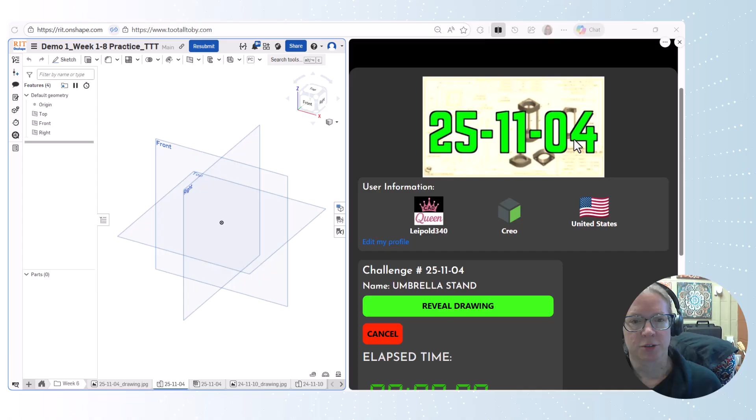All right, I am jumping into this Too Tall Toby exercise. Honestly, not in Creo today, but in Onshape. And this is going to be a great opportunity to talk about how to do some assemblies, how to do multi-body modeling in Part Studios, which makes this really nice. But then there's some trade-offs depending on how you want to create this. So there's some interesting stuff to do here. I haven't done this before, but I'm looking forward to jumping in and giving it a try.

Okay. All right, so we've got an upper and lower base made out of ABS, and we've got these three wooden rods made out of red oak. Nice little section view here. It looks like the top and the bottom parts are mirrors of each other, but with a chamfer on the top. So maybe a plane in the middle there.

So depending on the end use with these three wooden rods, because they are identical, depending if you want to have a bill of materials that looks like this, then I would create all three of the separate parts in a single part studio, but then I would assemble them so I could place this part three times, and that'll help make my bill of materials really nice.

If I didn't care about the bill of materials, I might make the three parts all extruded and then use it as a remove material, a Boolean cut of the green base part, and not worry about the bill of materials and just model three separate parts. They would show up in the bill of materials three separate times. So depending on the end use, there are definitely different approaches that you can take to a part like this.

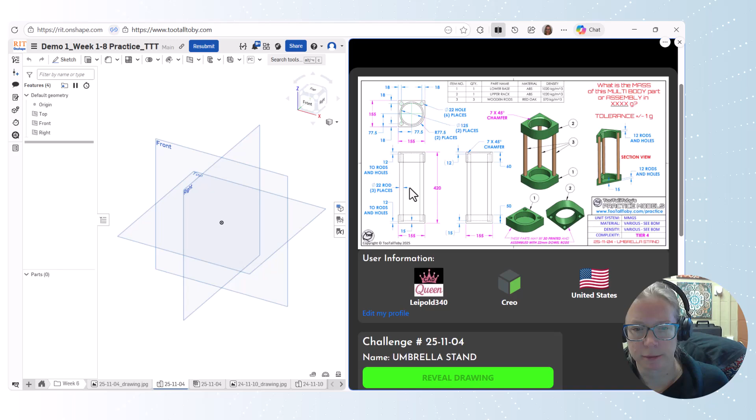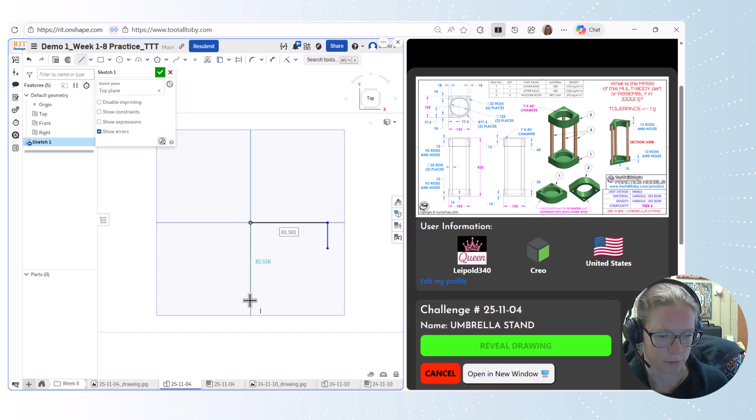All right, so I'm going to start with the base part on the top plane, and I'd like to expand this out a little bit. All right, so we've got a bit of a straight part. So that was the out and in trick to switch from a line to a tangent arc. Great trick, love it. Okay, horizontal, vertical, tangent. Let's make those two lines tangent. All right, let's get some dimensions on here. So each side is 155.

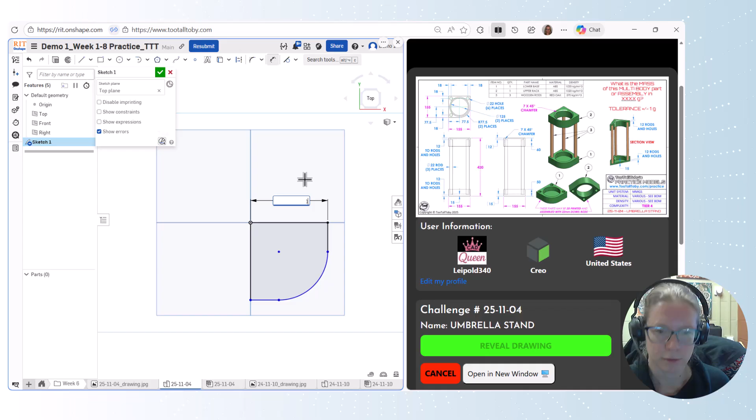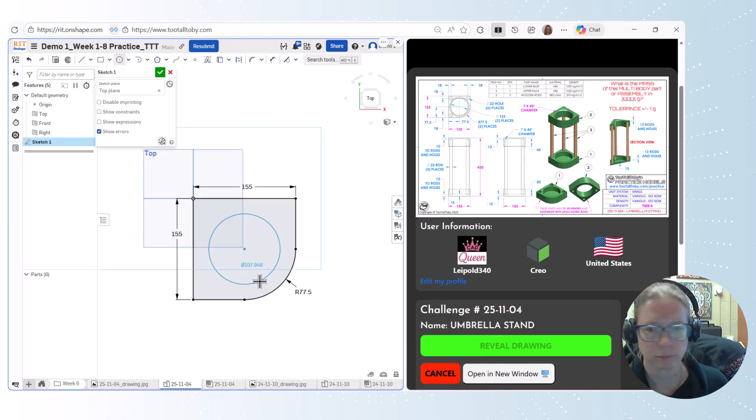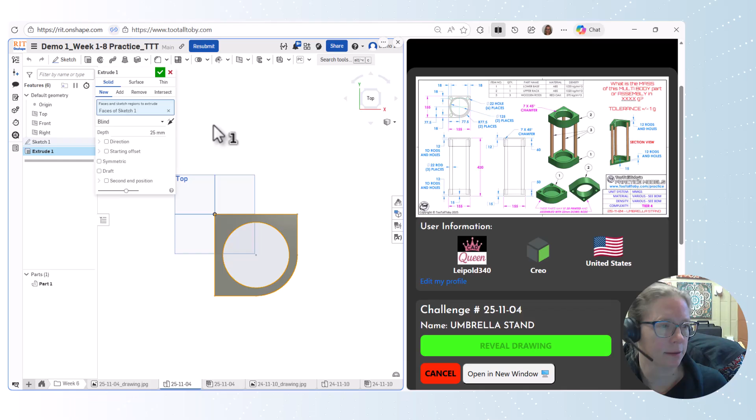You know what? I'm realizing. Oh wait, we are in millimeters. That's fine. This radius is 77.5, and this side is also 155. And we're going to add a hole. This hole at the bottom is 125. Okay, and that looks pretty good. So let's extrude that. And it has a height of 50. Okay. Shift 7 is my default view.

Okay, so now I'm going to create a plane. I'm going to take this top plane and I'm going to make an offset, and I'm going to go the full height, 420. That's what I'm going to sketch the top, or actually, nope, 420 divided by 2. There we go. All right. So let's mirror the first part over the mirror plane.

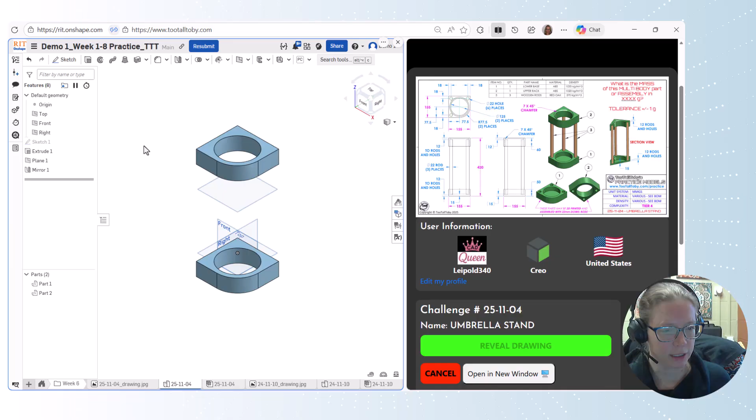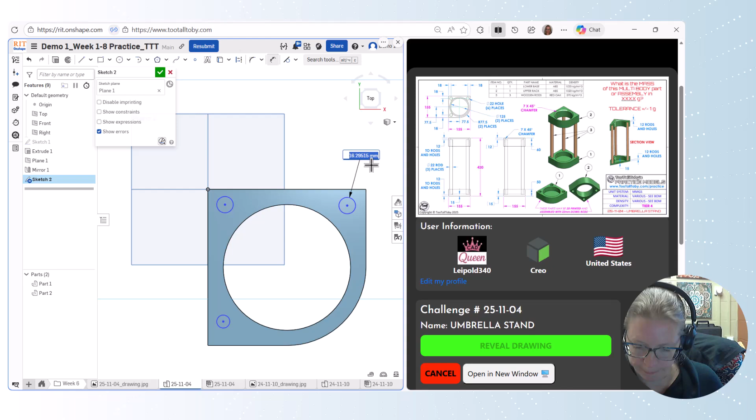Okay. Let's create a sketch on this plane. And let's get those 3 holes added in there. So I have a hole here, here, and here. They're all going to be a diameter of 22. So let's get these about where we want them. All right, I want those 2 points to be vertical. So we're going to grab vertical and click point and point. And then I want the other 2 points to be horizontal. And then I'll use E for my equal sign to make all of these holes the same diameter. And we'll finish up with some dimensioning.

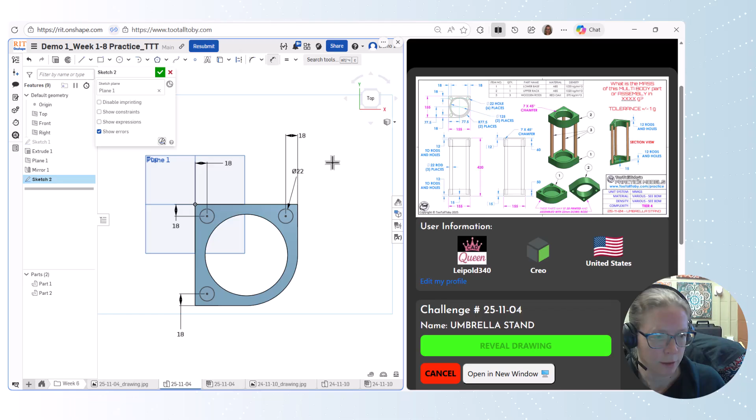So here to here, we're given that dimension is 18. Here to here, we're given that dimension is 18. And we could have done some of this with like construction lines to get some of the spacing to be the same, but I'm placing the dimensions as they are shown in the drawing here. Okay, so that is this sketch.

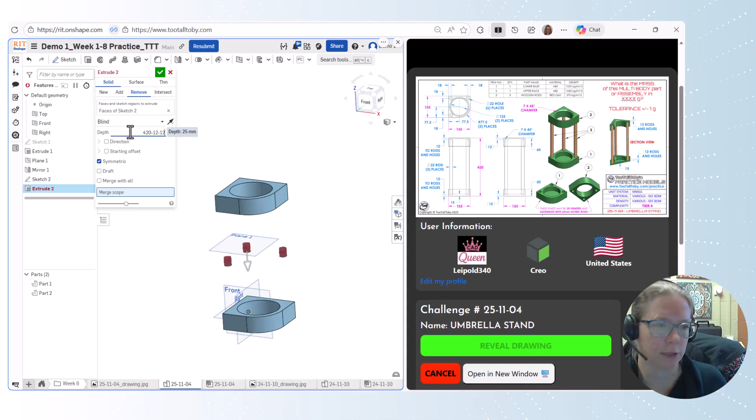And I'm going to use that sketch, and I'm going to extrude it. And I'm going to make remove material. It's going to be symmetric. And let's see here, 12 to rods and holes. So the overall length here is going to be 420 minus 12 minus 12. Okay. And we're going to merge with all. So we're going to remove material from both the top and the bottom. So we absolutely could have gone down to the bottom and then mirrored it. But we'll do this. Okay. And then my sketch is still here.

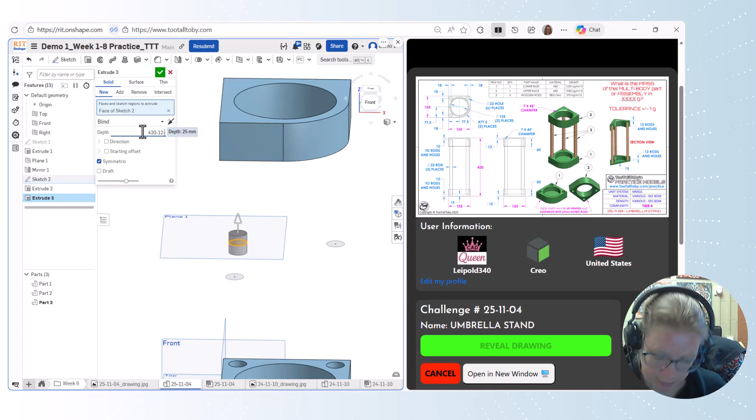So let's take the back one and let's extrude that one as a new part. We're going to make it symmetric. And that is also going to be 420 minus 12 minus 12. Okay, making sure it's a new part. And there we go. Okay, so holes are 22, the rod's 22. Okay. So we're not quite there yet.

Let's take and extrude from the first sketch. Let's take that center hole. We're going to extrude that up 15 as we see in the front view here. Okay, we're going to merge with part 1. That's good. Okay. And then up here on the top, we have a chamfer.

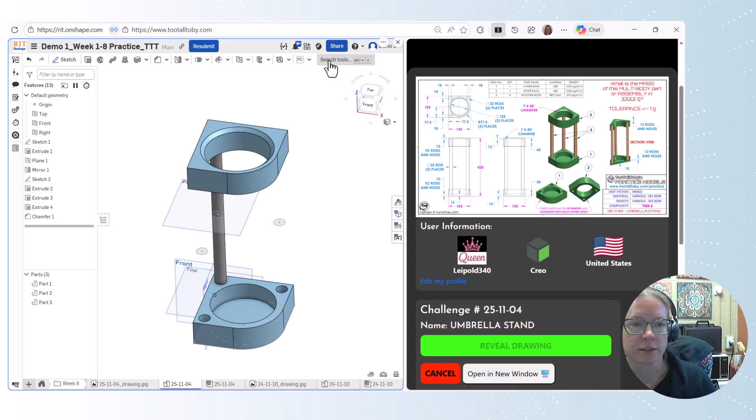Distance by angle, so 45 by 7. Okay. Just kind of checking to make sure I've got all these dimensions. I noticed that the top one is actually a height of 60, not 50. Good thing I checked. So let's use move face. And let's take this face and slide it down. Oh, 10. So instead of 50, we want that to be 60. Let's check. Yep. Okay. Anything else here?

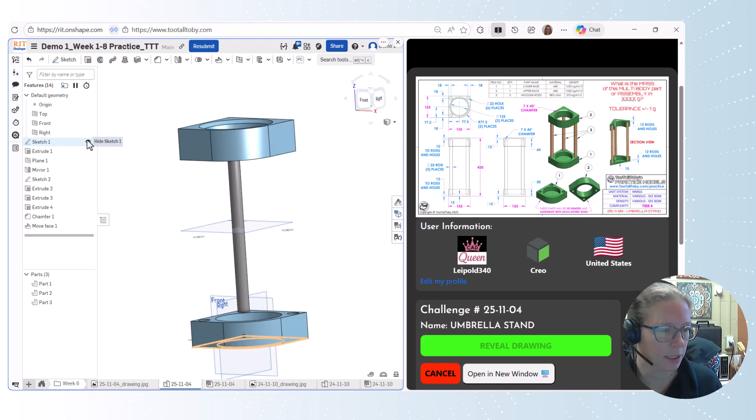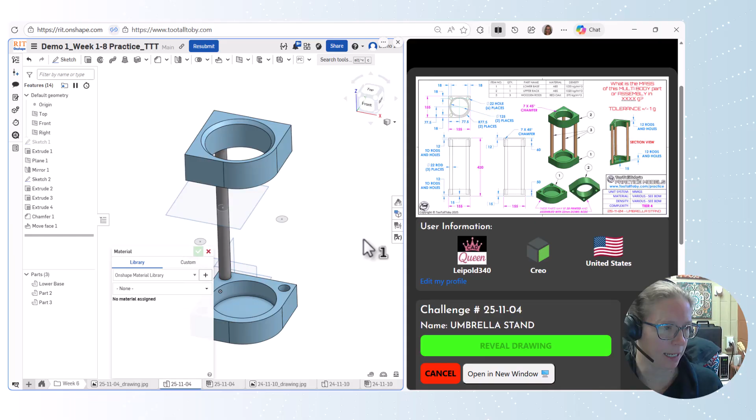I think we've got most of the parts created. Let's make sure they're right. So part 1, we're going to edit. Let's rename that. Part 1 is our lower base. Okay. Part 1 has a material. Sometimes I have a Too Tall Toby material library here. I don't have it today. Let's see here. I do have a custom table, so I can figure out that the lower base is 1.4 kilograms. Actually, I think this is applying to the entire part. But for today, we'll just do ABS. Okay, and we'll set it to be green.

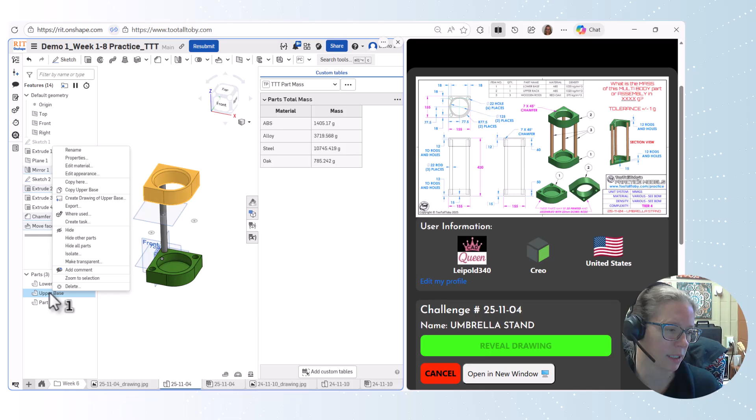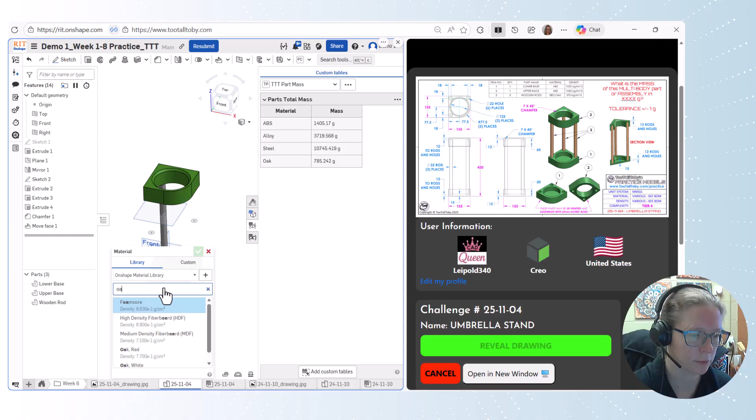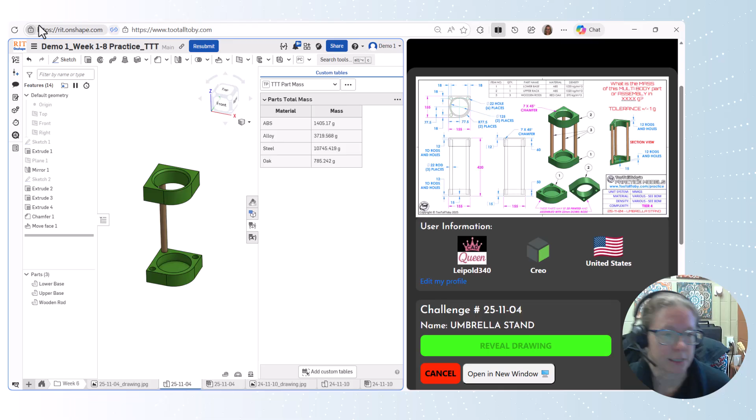The second part, we'll rename. We'll assign a material. And we'll, oh, it's green, good. The third part, we'll rename. And we'll assign a material. And we'll give it a color. We don't have great colors here. We'll pick something kind of brownish, maybe give it a little bit of a softer brown. There we go. Shift P will hide sketches and planes and all that fun stuff. Okay, so this, I think, looks pretty good.

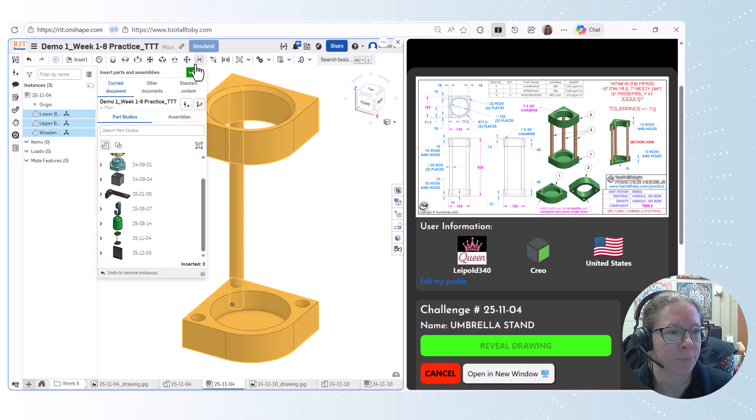For the assembly, let's go to here. And let's insert. Okay, so again, I made the choice that I wanted, oh, here's all, see all the work I've been doing. For this part, I decided I wanted to keep a good bill of materials. So I wanted my bill of materials to have the quantity for each of the parts. So I needed to do that by having individual parts. I brought them all in together and I can group them. They're fine the way they are. So we'll grab all those parts and we'll group them. We'll take the base and we'll fix that.

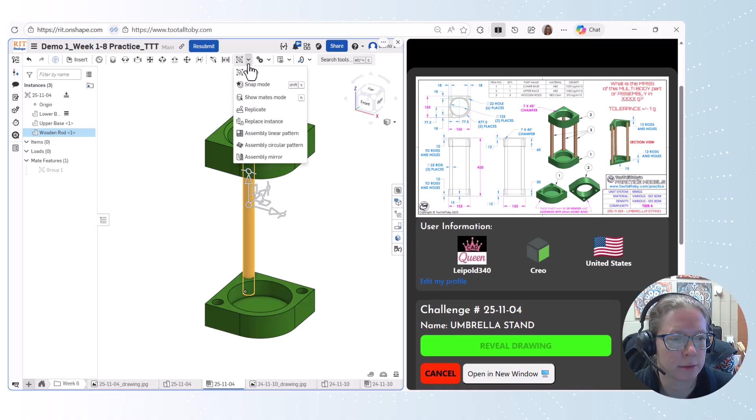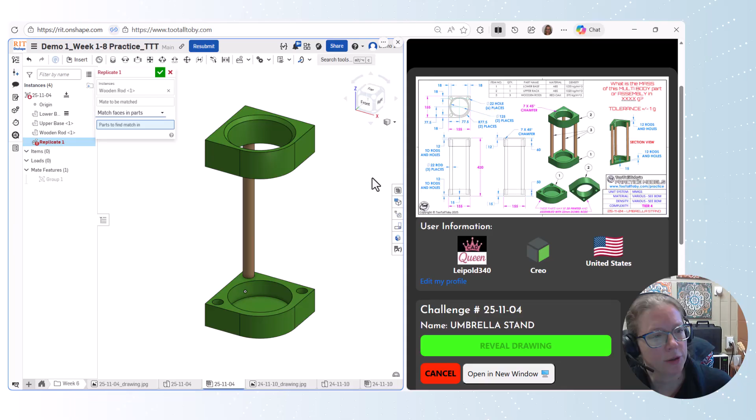Okay. And then the wooden rod, let's try replicate. Okay. So match faces in parts. Oh, all right. So it's actually not letting me replicate it because there is no mate. So if I had assembled this into the bottom, I'd be able to replicate it. So I can show you that. Actually, let's do that. So let's ungroup the rod. We can leave the top and bottom where they're located, but we'll fasten the bottom of the rod into the hole. Okay, that looks pretty good.

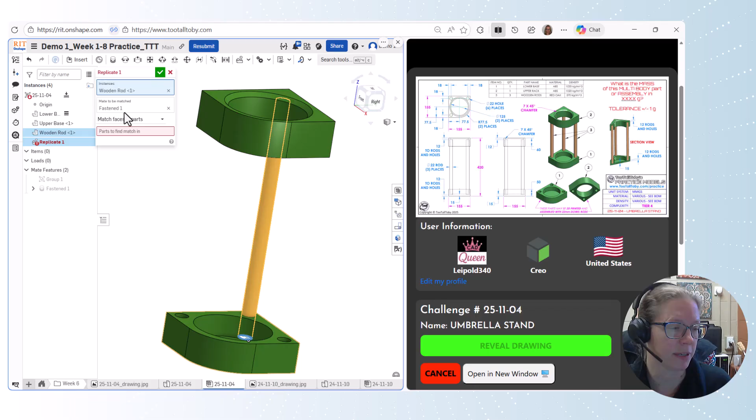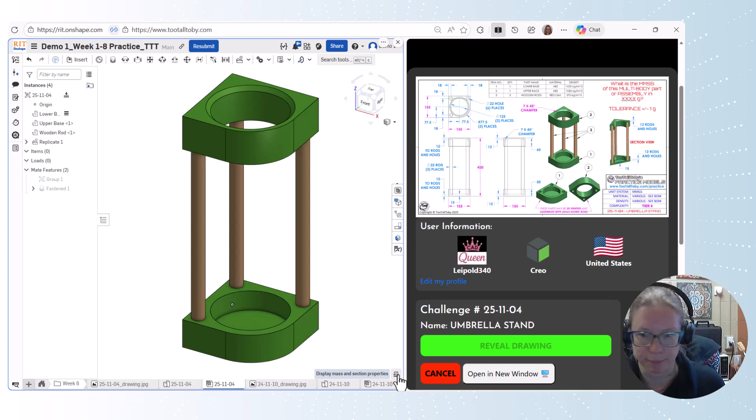And then if I use replicate, instance is the wooden rod. It picks fasten. Match faces in parts. We're going to pick this part. And there we go. All right. So our bill of materials here is going to update and show 3. Right? We've got the materials added. I'm not confident that my mass is going to be right because I don't have the Too Tall Toby masses here. I might have to go back and modify those a bit. But let's just check. If I pick all those parts, my mass I have here is 1638. Yeah, I think it's just the mass, but we can still try and fix those.

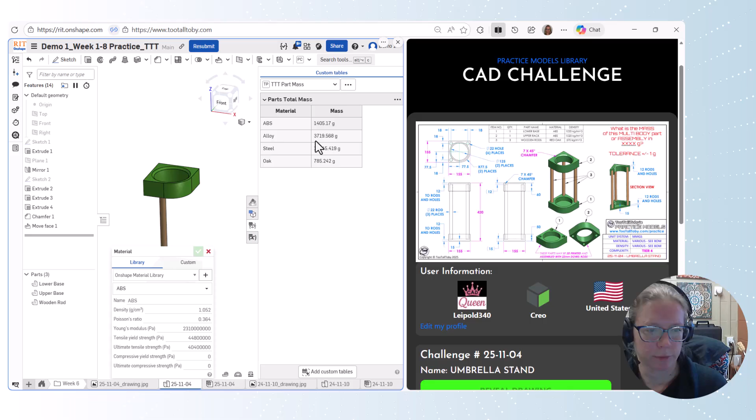I'm going to go change some of those masses in the part. Okay, so the lower base, edit material, the density here is higher than what we have. And for the wooden rod, we have different densities. So we'll make an update to that particular. I'll post an update with the mass, but here's a good indication of how you would assemble things, right? You want to make sure you got a single part fixed. The upper base, I have grouped because I designed it in the right place. If you had made these as 3 separate parts and had to assemble them, it'd be pretty straightforward by mating one of the wooden rods, and then you could mate this part on top.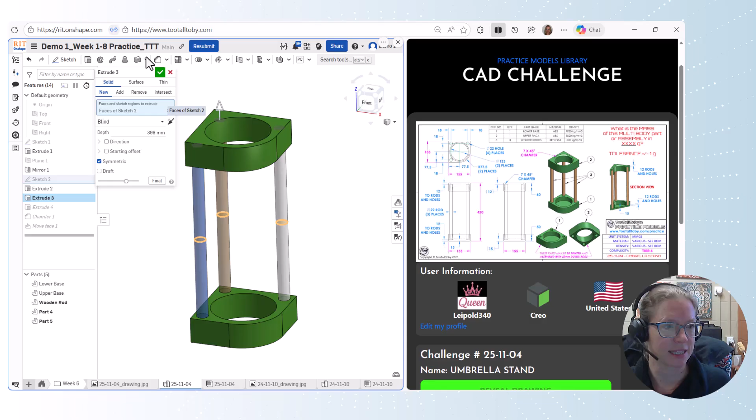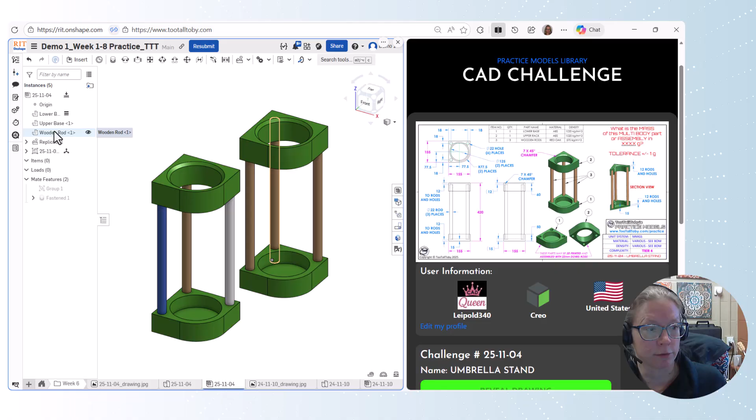If we had done it a different way, okay, back here, if instead of making the one extrude, I instead had created all 3 of them at the same time, then if I still need it as an assembly, a great option might have been to use a rigid part studio, and then you can bring them all in together. Okay, we're going to place this over here. We'll show you the difference with a rigid part studio. So I brought it in just as the part studio. I brought in all 3 parts. So the lower base, upper base, and one wooden rod. As a rigid part studio, it shows up as one line. Right? All the parts are listed inside of there, and they are completely stuck together. I cannot move them independent from each other. And if I needed to, I do have the option to dissolve that rigid part studio.

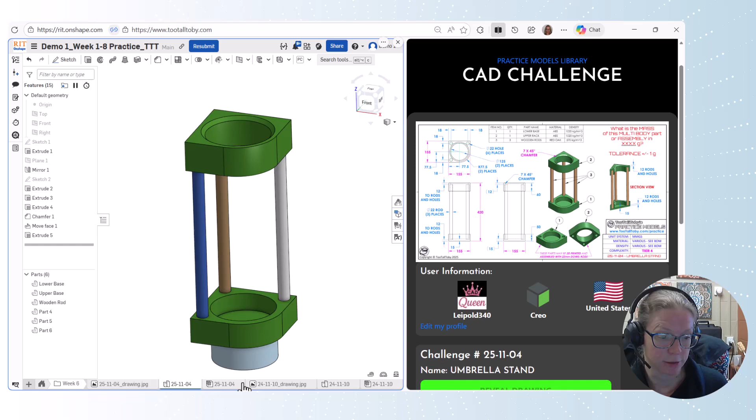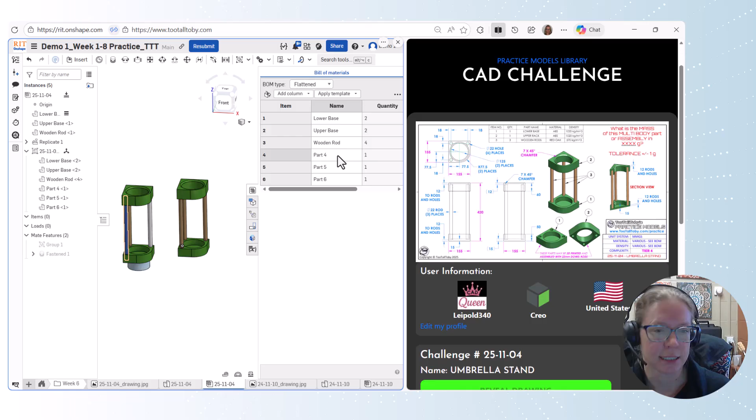Okay. The thing I love about rigid part studios is if I went in here and I added a totally separate, brand new part, part 6 in this case, right? There's a whole different part added into the part studio. When I go into rigid, it gets added in as well. So rigid part studio, super powerful tool in Onshape, and it really allows us to kind of treat that part studio almost like a subassembly. However, the trade-off is all of those items are going to show up as unique items in the bill of materials, even though my intention is that part 4 and part 5 are the same as the wooden rod. So there's definitely a trade-off, but something you should be considering as you're designing your parts for assembly.